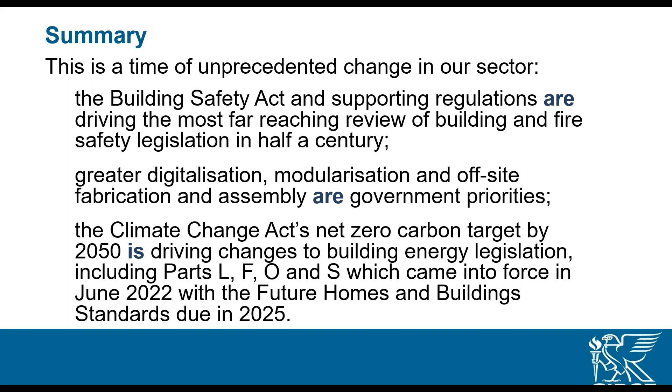Thank you, Christos. Yes, we appear to have Hal back online. So if we can go back to his last slide. Hal, brilliant, thank you, Ant. I'm here, Ant. Can you hear me? We can, thank you, sir. Over to you. Well, ladies and gentlemen, I do apologise for that. It was the IT, I have no idea what happened or didn't happen. I'm just going to have to go really fast. You're going to get the slides and you'll have the recording.

So we have the Building Safety Act. The Act makes some fundamental changes to the Building Act 1984, and it provides enabling powers that will permit the Secretary of State, currently Michael Gove, to introduce a wide range of new regulations to implement the various aspects of the Act, and I will go through them in a little more detail shortly. We also have the building regulations, and they will be part of the implementation package. And of course, we have net zero carbon related policy. There might be some uncertainty about what that looks like right now, given some of the announcements of the last month or two, but I think we have the Climate Change Act, that is an act, it's there. We have a net zero target, it's just not clear how we're going to get there yet.

We think that the Future Home Standard and the Future Building Standard, which are currently under development, will help us get there. And then we have other policy drivers. We have things like the Construction Playbook, Constructing the Gold Standard, the Transforming Infrastructure Performance. All of these are playing out. We have modern methods of construction, about which a lot more in the final session. And then this afternoon, we've got a session on physical and cyber security.

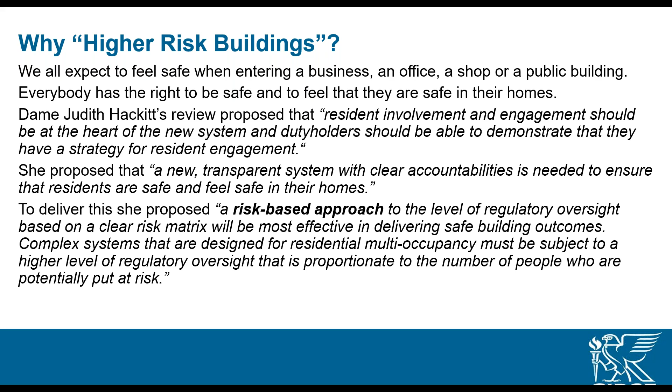It's worth noting that Part 4 of the Act applies to higher risk buildings in occupation. We've extended building legislation into operation there for the very first time. Now, I'm going to have to go very quickly, but you will have these slides to look at later.

It's important to say the primary aim of the Building Safety Act is to remedy the systemic failures that Dame Judith identified and to create greater accountability and responsibility, to give residents a stronger voice, to protect leaseholders, and it also extends the scope of the Defective Premises Act. Overall, there is a desire to drive culture change in the industry.

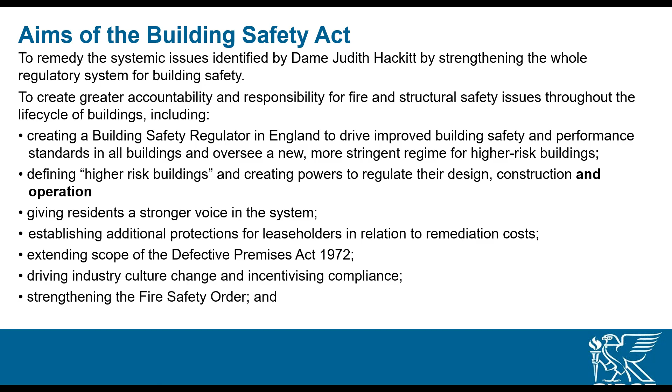And it also provides a clearer framework for construction products. Now, I'm not going to go through this in huge detail, but the Act comes in 6 parts, and it contains a lot of technical provisions relating to building regs, as well as provisions relating to the costs of building remediation.

Moving very swiftly through, part 1 is an introduction and scope and explains what the Act is doing. And as often happens with legislation, there are a number of secondary things tucked in there that government has wanted to do and has used the Act as a means to do it.

Worth saying that much of the Act only applies to England, but some of it applies to England and Wales, and some of it, particularly construction products and architects, applies to the whole of the UK.

Part 2 establishes the new regulator and committees and powers. So that's where the Building Safety Regulator comes in. Once up and running, it will have 3 new advisory committees, and the current Building Regulations Advisory Committee will be abolished. One of the consequences of this is that the department will be left without an independent scientific advisory committee.

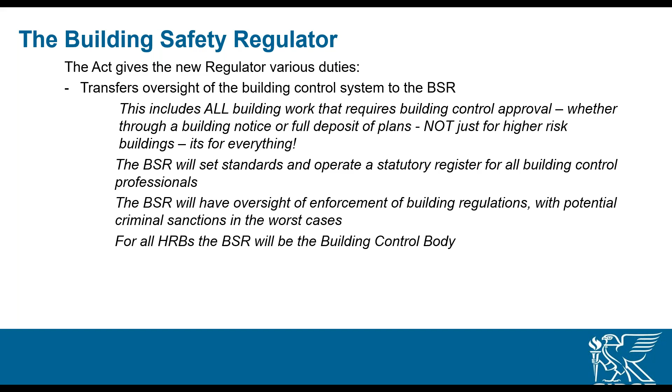The regulator is going to have various duties. It will have oversight of the whole building control system, meaning both private and public sector building control inspectors, and all aspects of building work will be within their remit. They will be setting the standards and operating a register for building inspectors, and they will be overseeing the new enforcement regime, which includes the potential for criminal sanctions and extends the time limits for enforcement action from what we have had up until now.

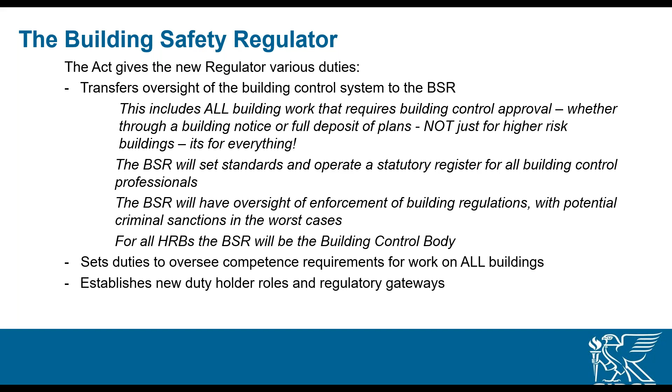And they also have a duty to oversee competence requirements, and again, that's for work on all buildings. It's not just HRBs.

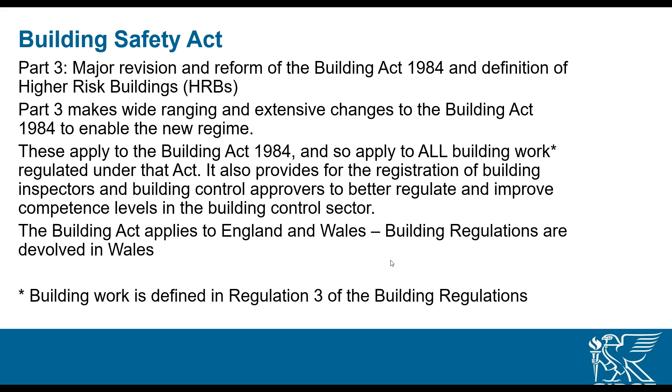Part 3 is a major revision of the Building Act, and there is a huge amount of detail there. It has effectively updated the Act and also introduced a significant number of new provisions that will enable the regulations that are coming and will support the work of the regulator. And if you want to know what building work is, please go and look at Regulation 3 of the building regs, because it's set out there.

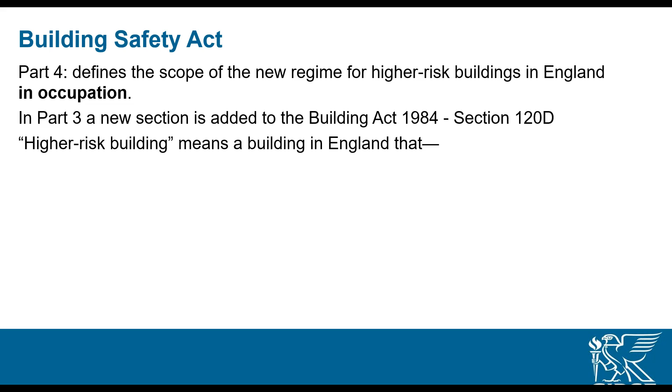As I've already explained, Part 4 deals with higher risk buildings in occupation. So it's not just new build, it's all of them, and there are about 12,500, we believe, and they are all going to be under the oversight of the regulator. We've done the bit about higher risk buildings, and it will apply throughout their life, and there will be an accountable person who must be appointed for every higher risk building.

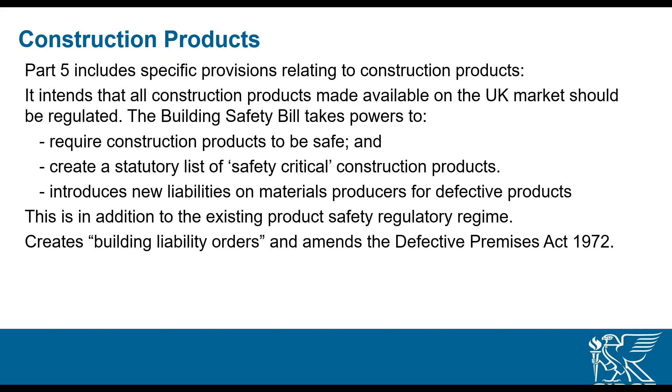I mentioned construction products, and there's been a lot of talk about product safety, and the bill provides powers to require construction products to be safe, to create a list of safety critical construction products, and it also brings in new liabilities on materials producers for defective products. And this all sits on top of the current regime, and indeed there is a new regulator in the Office of Product Safety and Standards, the OPSS, and that sits within BEIS, but again it will be answerable on policy for construction products to DLUHC. And there are also some building liability orders tucked in there, which I would recommend that product manufacturers are aware of. And there's a new Homes Ombudsman scheme.

So what? And we're nearly there, and I think we're going to have a few minutes of questions. How will building professionals need to respond?

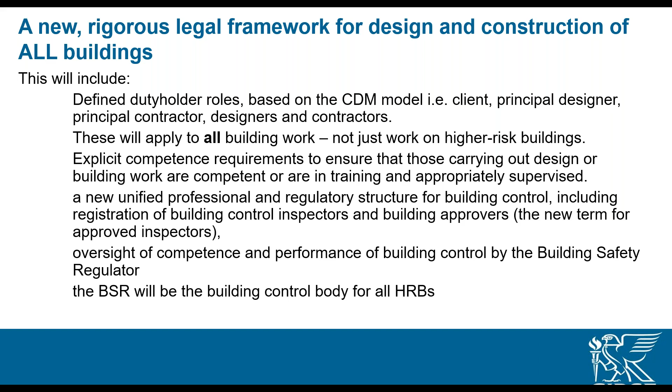Well, first of all, anybody in the sector needs to get real. The Building Safety Act is for all. It's not an optional extra. It's not just for high-rise apartments. It's for everything. And there are going to be some very explicit new requirements around competence. Everybody working in the industry needs to be thinking, how can I demonstrate that I am competent to do what I do? What evidence would I put in front of somebody who asked me to demonstrate my competence? And that needn't be a regulator, that could be a client taking their new responsibility to take all reasonable steps to assure themselves that the people they're appointing are competent.

So that's going to be a big change. And then, a final question about how we react to this. We do need to be clear that these changes in legislation are coming. They're not optional. They're not going away. There are going to be changes to professional accreditation for those who are in the professions. There are going to be the new roles of principal designer and contractor. The HSE will be overseeing building regulations and the building control function. There are going to be responsibilities on accountable persons in higher risk buildings. We're going to see a requirement for the golden thread, for safety cases.

And for existing HRBs, there will be periodic reapproval and certification. So there is a huge amount coming. I quite understand when people ask about resources and timing, but the truth of the matter is we've had 5 years warning that major change is coming. And the best time to have started preparing would probably have been a little while ago, but if we haven't, then the time to start preparing is now. And at that, I'm going to stop and hand back to Ant, and that just leaves us 5 minutes for questions.

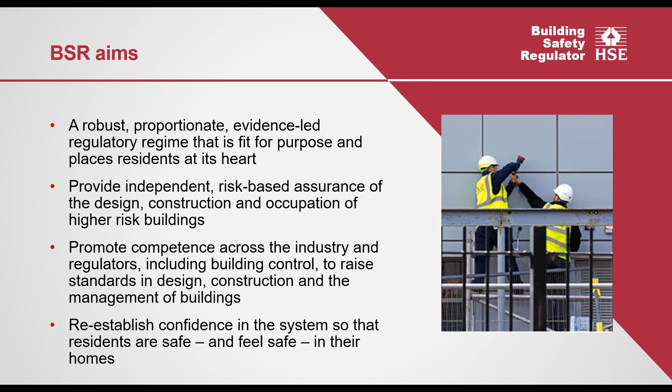As was mentioned previously, and I'm going to double down on this message a few times, the new regulatory regime isn't just about high-rise buildings. High-rise buildings are a very important element, but they're just one of three key focuses. I'll start with the oversight function, which has two key elements: the regulation of the building control profession, creating a regulated profession, and the wider oversight of the built environment, ensuring safety and standards for buildings now and in the future.

Picking up on the building control side, BSR is developing performance standards called operational standards, rules, and key performance indicators to oversee, monitor and assess the performance of the profession. This comes from the key driver highlighted by Dame Judith in her report around increasing consistency and moving the profession away from what was perceived as a service provider role into a more regulatory space. We don't see this as any criticism of very diligent building control professionals, just a recognition that there's been some inconsistency in the past, and we're looking at ways to address that.

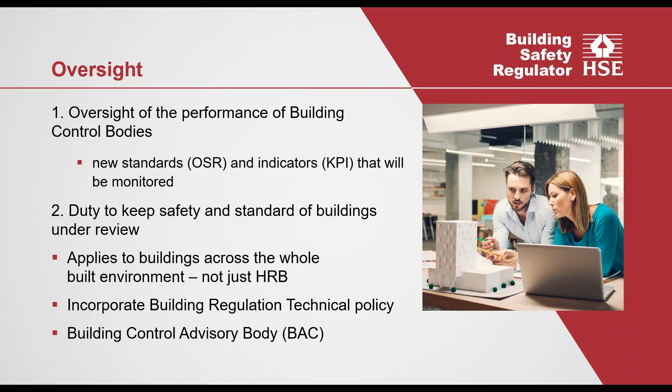DLUHC will retain the policy lead for the building regulations and the Act, but the technical policy, the approved documents, and the guidance underneath that - HSE, in the form of the BSR, will be taking that lead. What we'll look to do is assess how that whole system is working, challenge where it's not being used effectively, and change where we think the standards aren't working or need updating to consider future needs.

As part of that process, the next item is the Building Advisory Committee. This dovetails in and supports nicely that wider oversight, as we'll be using this to think about the strategic steps we need to take to improve standards. It'll be made up of 13 leaders and experts across the spectrum of industry. The recruitment process has just finished, and we aim to have a first meeting in December.

Hal, who spoke previously, was the chair of the Building Regulation Advisory Committee. BAC isn't going to replace BRAC in its functions. It will have, from our perspective, a wider remit, a much more strategic overview, to encourage and promote the use of the right standards, and challenge where necessary, think about new and emerging issues, but also provide intelligence, think about the effectiveness of the regime as it is, including the proportionality of the BSR's approach.

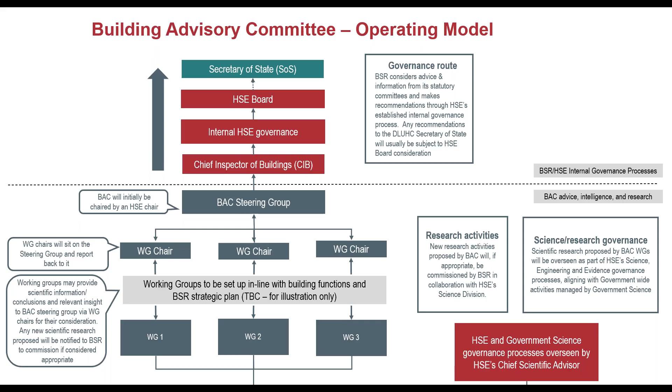So moving into competence, my area, and I'll say it again: the BSR has responsibility to promote competence across all buildings. And I think, as I said last year, double down again on this point. Lots of feedback I've had from various stakeholders, and I think Hal touched on this as well in his presentation, that people will look to avoid the new regulatory regime by not working on higher rise residential buildings. And I think it's important to say that's simply not the case. The oversight and the competence requirements in the law, which I'll touch upon later on, extend much more widely than just high-rise buildings.

And the approach we've taken to competence very much follows the recommendation of Dame Judith Hackitt, looking to support industry to come up with frameworks and standards for training and verification. We really don't see it as government's job to set all this out, because we acknowledge the people doing the job in industry are best placed to understand what needs to happen to raise the game.

I think part of the process, and I was privileged to be on the steering committee for the various PASs that Hal mentioned previously, is actually trying to work out what is proportional. We want to be aspirational in terms of the competency requirements, but we don't want to set the barrier so high that it can't be reasonably achieved. So actually trying to work through all of that and work out what the requirements are and how these can be achieved is possibly one of the challenges.

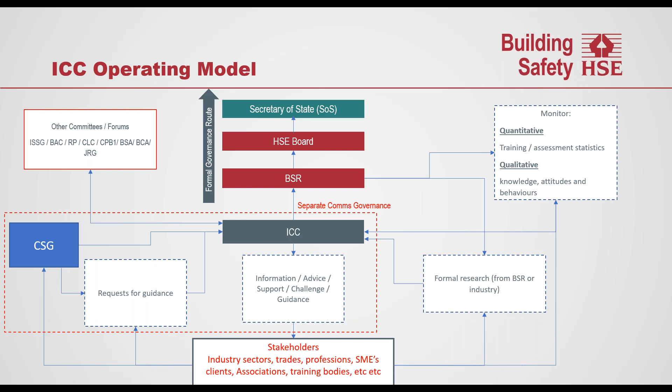This slide is a little bit busy, apologies for that. It also sets out lots of the activity, the monitoring, the guidance, etc. I think this next slide may well be a little bit more helpful because that sets out in a more simplistic way what the committee is looking to achieve.

So obviously it starts with industry, the stakeholders. I think what we want to start doing is to review and monitor what's actually going on in terms of competence provision, where are the gaps, where are the challenges, who's doing it well, and then oversee this to try and think about how we facilitate improvements. That might be through advice to the BSR, or direct advice to industry or potentially the public. Then, completing the circle, we want to carry out research to learn, to really understand, is what we're doing effective, what more can we do, and then complete the cycle again.

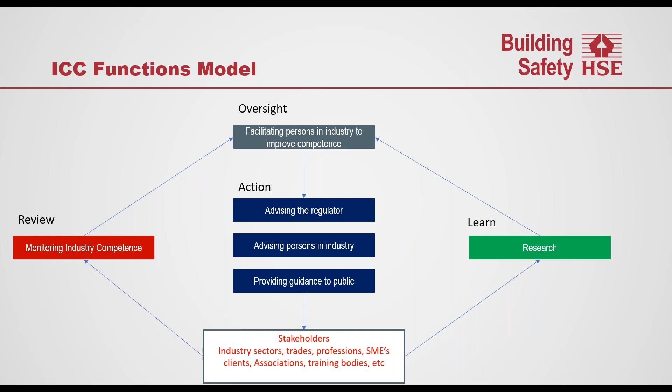So that's the plan of what we want to do. How we want to do it is set out in this slide, and this is a theory of change model for competence, or intervention logic model. It sets out the process at a very high level that we think needs to occur in order to improve competence. Improve competence is obviously a very big thing to say, so this unpacks that to a certain extent and puts that into a staged process.

So going from left to right, what we need to have first is those standards, frameworks, codes, guidance, so individuals in the built environment, no matter what sector or role they're in, understand what the competence requirements are. A lot of this work has already happened. Obviously the BSI PAS standards for principal contractor, principal designer, and those managing buildings is exactly what's required to set out those standards, along with the Flex document, which explains how those competency frameworks can do that. And then the work of the competence steering group is also really pivotal in setting out further benchmarks and requirements for different trades, professions and crafts across the built environment.

Some of the work of the interim industry competence committee involves looking to survey the wider built environment.

I mentioned CSG, I mentioned the BSI, but actually there's lots and lots of sectors out there, and we're not sure who has frameworks and guidance to set out competence and who doesn't. So I think that's part of the work the interim committee will be doing.

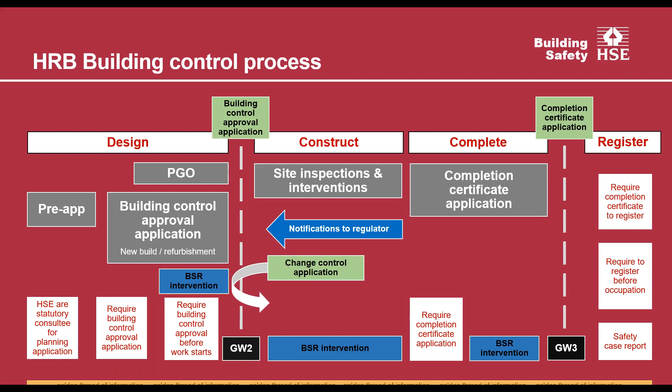Yes, so the golden thread. I think this is really important. I think the BRAC definition is a very good one. I personally use an even shorter definition: it's the important information about building safety. And your test of something that goes into the golden thread is, is it important for building safety? Is it something that somebody trying to manage a building now or in the future would need to know?

If yes, you keep it. If no, you don't. I know that sounds easy and probably a massive oversimplification, because I think a lot of the information you'll get is probably going to be in that grey area in the middle. But that requires somebody, or a team of people, to make some intelligent decisions about what information they keep.

Obviously, you will require some software, some IT infrastructure to store the information and collate it. However, I don't think there's going to be software that will enable you to make those very difficult decisions. I don't know if there's an Elon Musk style Cyberdyne Systems, Skynet, AI supercomputer out there. I think that requires people to make those difficult decisions, because, and I may have said this last year, I think the worst decision you could make is to keep everything, because if you mix the unimportant with the important, you make the important unobtainable, in my experience.

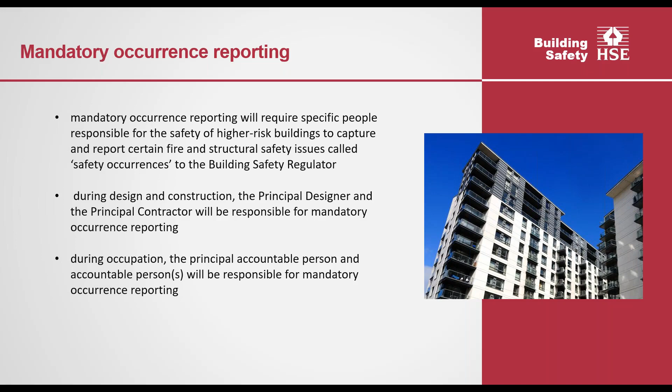New topic: mandatory occurrence reporting. I won't go into too much detail, but we'll look for responsible people to capture reports of fire and structural issues, or the precursors to them. During design and construction, this will be the principal designer and principal contractor. During occupation, this will be the principal accountable person or the accountable persons. I don't have lots of details to give, but there will almost certainly be a focus on key indicators of any potential catastrophic failure.

Safety cases. Moving away from design and construction into occupation, one of the key requirements will be the production of a safety case and a safety case report for those managing higher-risk buildings. It's a very new concept for higher-risk buildings in occupation. It comes from the regulation of chemicals, nuclear and aviation sectors, as a way to mitigate the types of high hazard events that happen there.

Think of a safety case almost like a risk assessment: identifying the hazards, the route by which people are likely to be harmed, how it will happen, and the measures in place to reduce those risks or mitigate the consequences. The safety case draws together all the information from your golden thread that you use to manage fire and structural safety risk in your building. It's the evidence used to demonstrate or justify how you're preventing a major accident.

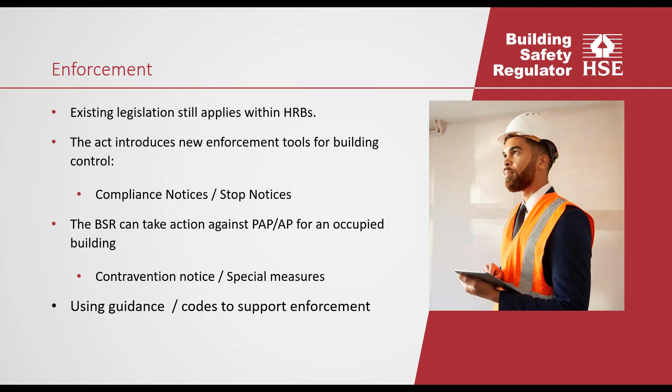And just finally, multidisciplinary teams. So this is how we're going to operate in terms of the regulators. One of the criticisms of the Grenfell tragedy was regulators not operating in a joined up capacity.

So we decided very early on that we weren't going to try and recreate specialisms within the Building Safety Regulator, because actually we've got the expertise in others - building control, fire authority. So what we're going to do is all work together and form what's called a multidisciplinary team to assess the parts of the project that are within our competence, skill set, expertise.

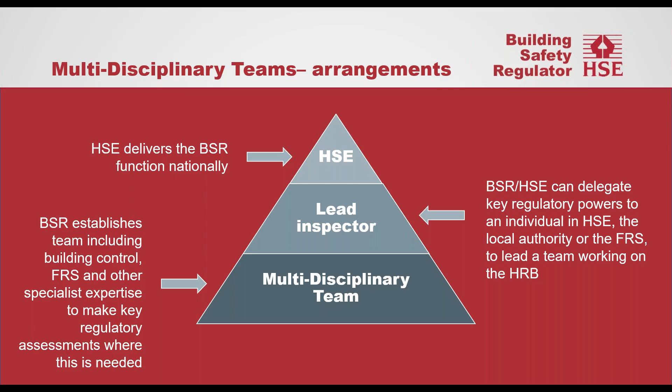HSE, the BSR, will be the ultimate decision maker within that process, but actually we'll make those decisions based on the recommendations of building control experts and fire experts. And that is me.

So I'm quite happy to take some questions, and I'll put on my camera.

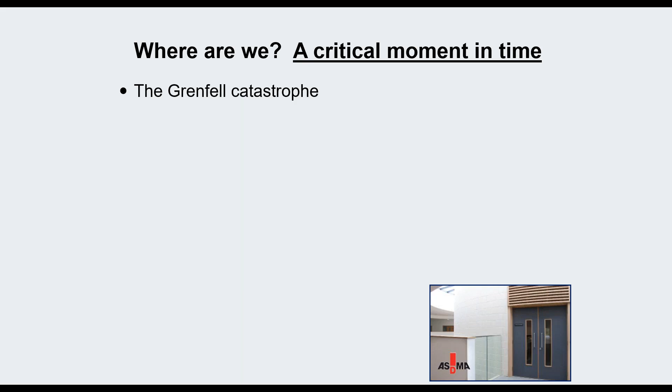The Grenfell catastrophe, certainly profoundly shocking, a profound shake-up. It shouldn't have happened, and we should leave it for the inquiry to finish its job with its report. As the judge summed up, there's a task there to untangle individual mistakes from commercial company cultures and company mistakes, common misconceptions, and the common paradigm that applied in building design at the time the design was put together. So we wait for the inquiry.

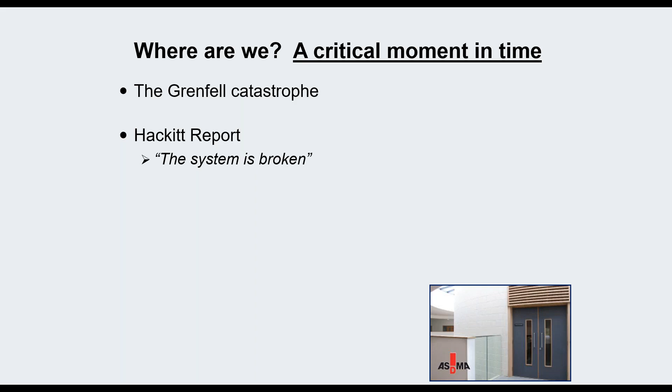The Hackitt report has been referred to, 156 pages and thousands of words, which so often you hear summarized in four words: the system is broken. I don't entirely buy that in its entirety. Certainly the system has not worked as it should have done, and it needs to be repaired, and we've heard a certain amount of work going on to do that, so we should let that run its course.

Part of that is new foundation legislation, which very much is establishing a competency-based culture, and competency for me implies knowledge base as well as the right attitude. And I think a lot of people will agree that there needs to be a tremendous improvement in the level of knowledge, and as far as I'm concerned, that applies very much to products.

That's the expectation I have with the Morrell report, Testing for a Safer Future, which was set up by government to report last year, about a year ago, I believe it did, on testing and certification aspects. We haven't seen it yet, and it isn't yet in the public domain, so it isn't commonly appreciated what it contains. It's been withheld, and the reason why is not clear.

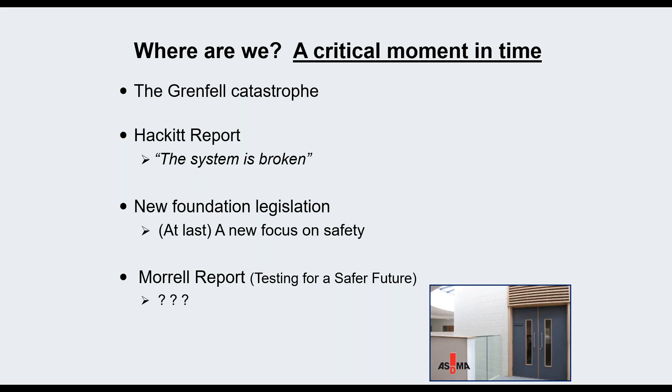But as far as I'm concerned, I have high hopes of the Morrell report, and I think it will be just as important as the Hackitt report. I expect it to be. There's going to be plenty of food for thought, I'm sure, in its content.

To sum up, there is a desperate need, really, to rebuild trust. Not just trust in how construction works, but trust in products and design. And at this point, I think I'd like to make three key points on the basis of trust.

First of all, there hasn't so far been enough focus on the good, and there are strengths in the UK approach. There are good products, there are good companies, there are certainly good sectors and good approaches which can provide examples, but they've not been given enough airtime, and hopefully we can start that and get more attention.

Number two, it isn't right and logical to assume that problems identified in one particular area automatically translate across to problems in all areas. But that seems to be the dominant thinking, and it's a narrative that seems to suit the way forward. But I would make a plea to look at the good examples and follow those up rather than inventing new solutions. There are existing solutions already.

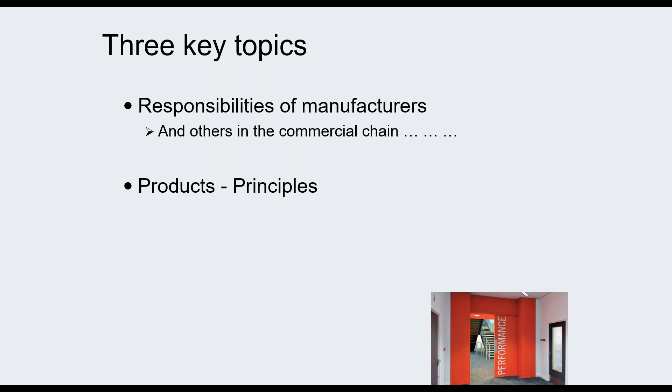Then, technology is very important - not just the product, but product technology - and I'll describe what I mean by that, how to evaluate a technology. It means a lot of testing. At the end of the day, validation of performance, confidence in product performance, and assurance of product performance is fundamentally important, and that requires a lot of testing, which leads into certification.

So I will finish up with an explanation of what I mean by certification, as opposed to what you may mean by certification.

So the first part, responsibilities of manufacturers and others. For me, it's clear that anybody who produces and handles a product can't just throw it into the market and expect others to decide how to use it and to know how to use it. So fitness for purpose is key, not just compliance with the specification, but demonstrating fitness for purpose, which includes, especially for fire, safety applications.

In some cases, not just fire safety, but certainly safety in various applications in other respects. For doors, for example, that would be safe use of the doors - opening, closing, no accidents, no injuries, etc. Not so easy to achieve.

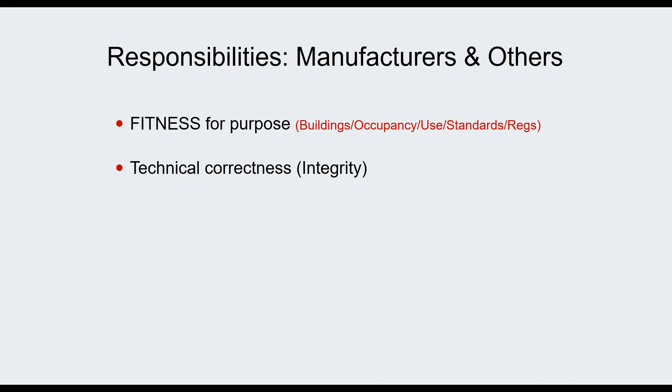With reference, I think guidance on how to use and apply products is very important, not only from manufacturers, but especially from trade bodies. Within that, there are three particular points I want to draw attention to. There's a good word in fire resistance called integrity, which means technical correctness and rigor, and I don't think that can be placed on one side. That should be a primary requirement, which leads to the second point: technical should be above marketing. Marketing should be subordinate to technical, where we have technical applications and technical products. I'm afraid too often it's the other way around, and we don't have the technical substance, but we have the image marketing. That's not, as far as I'm concerned, desirable if we're looking at safety, and safety critical in particular.

You can't avoid the relevance of information and data to the situation and the use. That's in particular data and information which must be appropriate, relevant and applicable, ARA. So it isn't acceptable to take test information for one product and apply it to another or to a different design. It isn't appropriate, it isn't relevant, and it wouldn't be applicable. Those three: technical correctness, image marketing subordinate to technical, and the relevance of information and data to the situation and use of the product, very important.

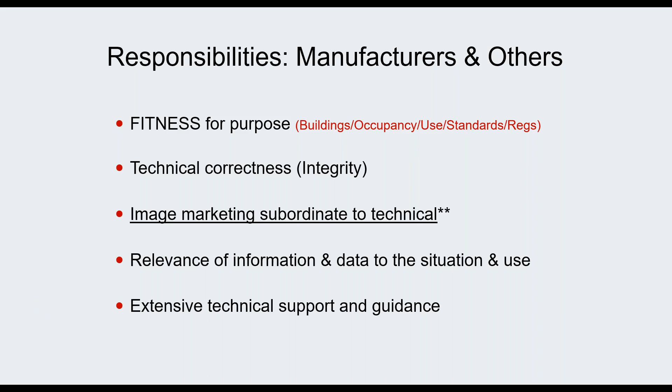I'll add that the final point, that extensive technical support and guidance is needed, and for that I really am a great believer. You heard at the beginning my commitment to trade associations. I think they're very important indeed, because they represent the particular sector and companies in the sector and those who serve the companies in the sector. They're ideal for bringing together best practice guidance, so to speak, on neutral ground without commercial implications, and they can bring it together from the companies in the sector and summarize it and make it available for all those who are going to be using the products provided by the sector.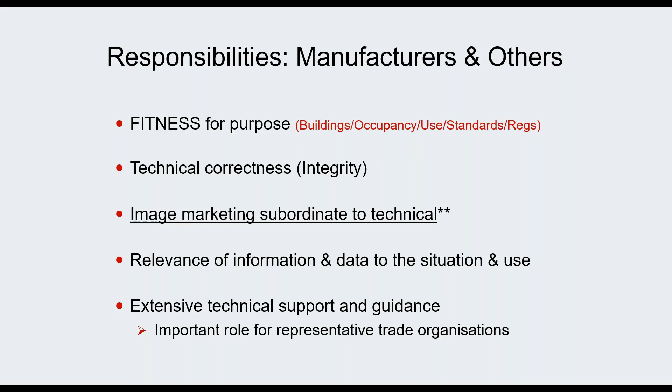So the next two slides illustrate, just by reason of illustration and example, some of the documents that come from ASDMA. There are others. I've just picked these because these are some of the main documents, but there's smaller ones, single page documents, double page documents, five-page documents. These are just examples of some of the key documents that are available from the Trade Association's Knowledge Centre on its website, easy to find.

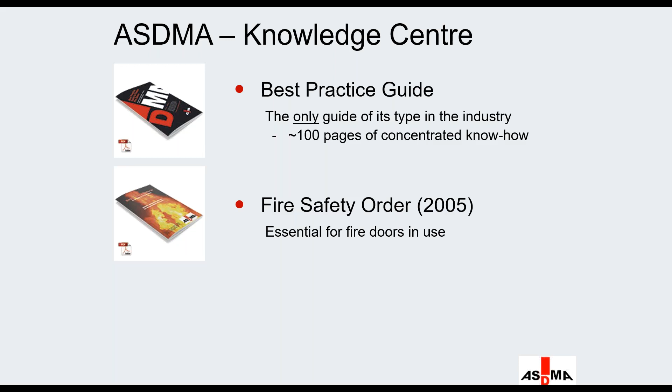So more than 100 pages of a best practice guide. It stood the test of time. Really is best practice from a former age maybe, but it's still the best practice of the sector. There's explanation on things like the Fire Safety Order. Similarly, there'll be guidance on the Building Safety Act and the Fire Safety Act and so on. Recommendations on acoustics, because that's just as important for many doors as fire safety is. How to install, maintenance, damage and troubleshooting advice, safety considerations including security, and coordination of bespoke door sets with what's around it and how it fits into a building.

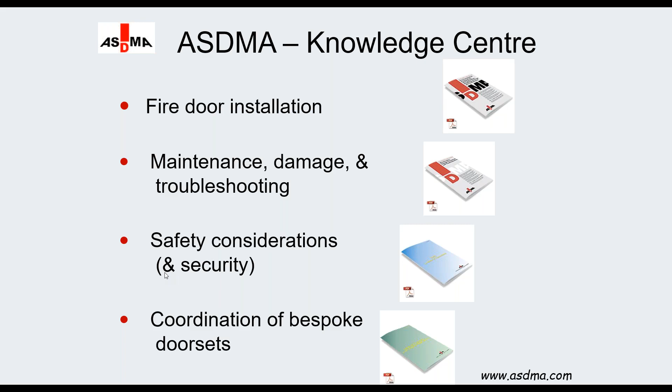Right, so I want to focus rather than product on product technology. The first point is really quite fundamental, that a lot of construction products fundamentally depend on a system mentality. A fire door, for example, it's surprising - you may not realize a fire door is really quite complex construction. But you find in a fire door something like 50 main items in a single door. There's something like 144 different timbers commercially available on the market to manufacturers. Typically they'll hold in stock 70 to 80 veneers.

Amazingly, if you sketch out and draw the various configurations - single doors, double doors, single acting, double acting, with panels, with glazing, with side panels, with side glaze, etc. - there's a total of 288 door configurations you can draw up. A manufacturer, not producing commodity product, but producing specialized bespoke doors to individual specifications, maybe 50, 20, 30, up to 100 or so at a time. The plant will be in different workstations, and there may be 20 to 30 workstations in line, and products will go through various workstations according to the specification that they're going to be satisfying.

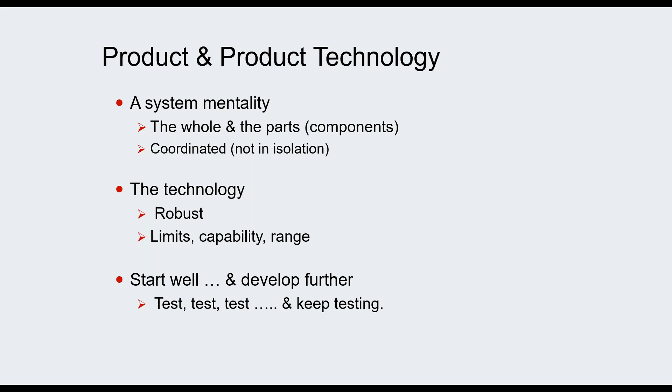The key conclusion is you can't leave fire safety to chance, or any safety for that matter. It must be something that's designed for, planned for, focused on, and continually evaluated against the conditions where the product is going to be used, potentially and actually. That's a very important point. Fire safety must be designed for, and it must be focused on specifically to perform in the conditions where it's expected to behave safely and as intended.

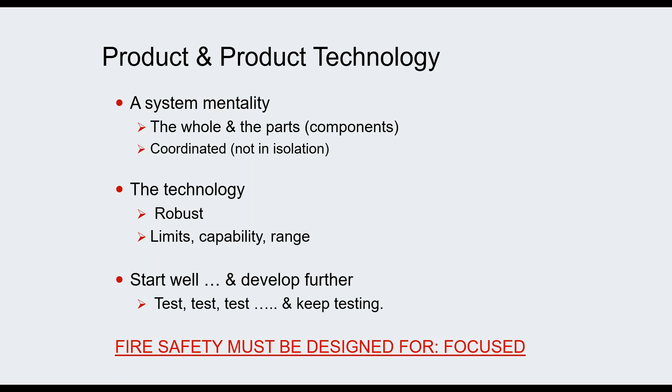It must follow a scientific approach. Actually, developers of products follow a scientific approach, probably without realizing it. And there's got to be a role for a technical product technologist. I sometimes wonder if I'm the only one who thinks that. So many times I just see products looked at in isolation, away from the application, away from the technology, just as a product in isolation.

So it's important to have, you could call it theory, but it's more than that, a product technology model. So you put all the sum total of testing information together that you're aware of, and sometimes you'll be testing to evaluate a weakness, to see if it is a weakness. Sometimes you'll be testing beyond the field of known test experience just to evaluate where that takes you.

So it's a scientific process based on a model or a theory of how, for example, a fire door works, how it functions in practice, how a glass works, how it behaves in different combinations, different sizes, different glazing arrays, including sensitivities, with a commitment to improve. So you're all the time testing the model, evaluating the theory to make sure it works, and grafting in the new information that you get from testing. So it's a continuous improvement, not static.

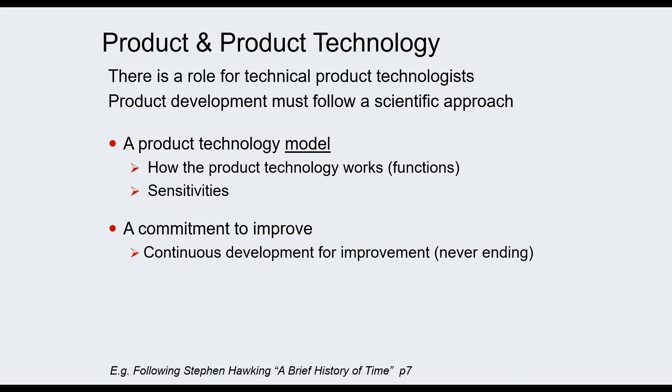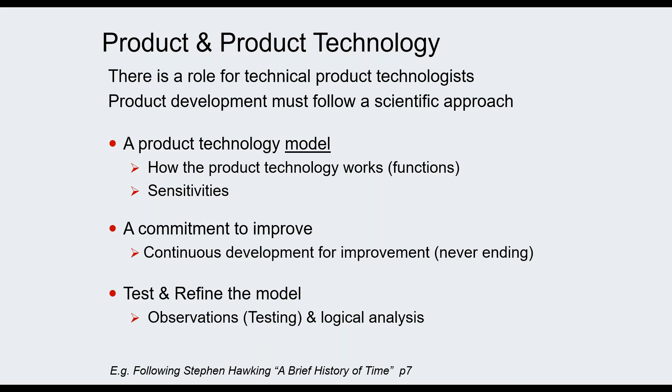And it's never ending, because the demands from buildings change. Specifiers are notorious for asking for almost impossible requirements. So there's always pressure to develop to suit the application and the specification that's required. And so everything goes together. It's a circle: test and refine the model, do more testing, make more observations, carry out more logical analysis of what happens, and develop very much a system understanding.

The task for the technologists, the manufacturers, the developers is to communicate that understanding of how systems work, especially being honest and open on the limits of the technology, because there will be limits. So where can the product be used and where can't it be used? Where are the reservations? That sort of information should be part of the dialogue.

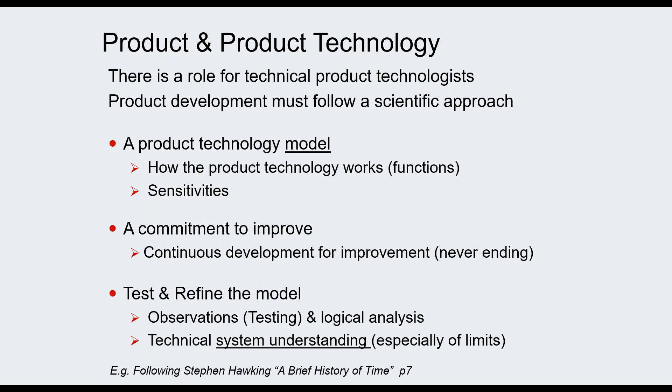What to look for in a test? So often I hear we got 31 minutes, we got 61 minutes, we got 62 minutes, that's enough. It isn't. It isn't. It's not just the result, you go further. So I would always take a test for fire resistance, for example, as far as it goes until I start to see failure in the test, because that's where you get most of the information.

And there's a well-established technique which originally came from the military, in the American military in the 1940s, which in effect is a basic risk assessment of products and product technologies from test observations and analysis of those, and is called FMEA, failure mode and effects analysis methodology. You can put a C in there as well if you wish: FMECA, failure mode and effects and criticality analysis.

This looks at several different aspects, all of which, if you're observing a test, this is the sort of thing you should be looking for: the mode of deterioration, the onset of critical failure, and what the failure within the test actually is. There's a world of difference.

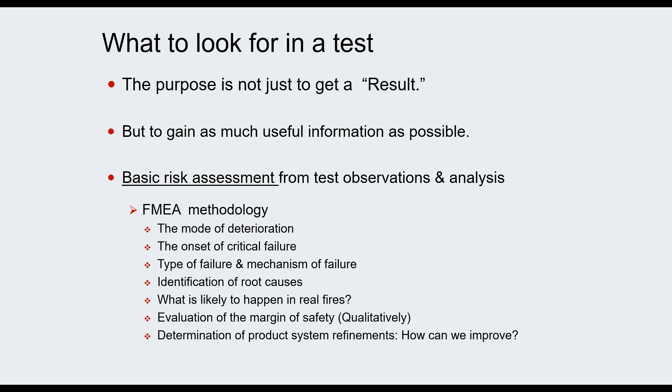And then you lead to product improvements and refinements, all of which is towards reducing the risk of failure in use. And if you put your name to a product, you need to have peace of mind that you've done all that you can possibly do.

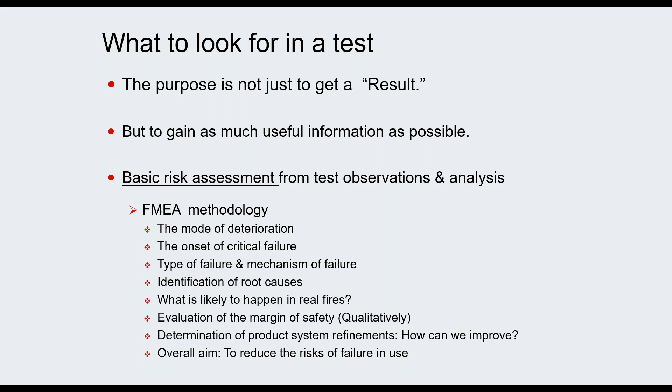So you would repeat this several times. You wouldn't do just one test. You don't just leave it at one test of one design.

So the test, it may be just one test, but all the tests that have gone before inform that one test and lead you to it. And in turn, that one test goes forward and informs all the future tests as well. So it's not a test in isolation, it's not just one result.

It's a whole mix of past experience and analysis of that experience in terms of the technology and the capabilities of the technology. So if you imagine lots of those situations overlapping, lots of those cones overlapping, it all goes to mutually reinforce itself so that you've got a good model concept of the product and how the product works. And that's really quite fundamental.

Accumulated test experience. And the more the merrier, the more you can see, the better. I used to have an office which was 2 minutes away from 2 very big German test furnaces, so I used to go and see a test every day, sometimes twice a day, accumulated over weeks and over years.

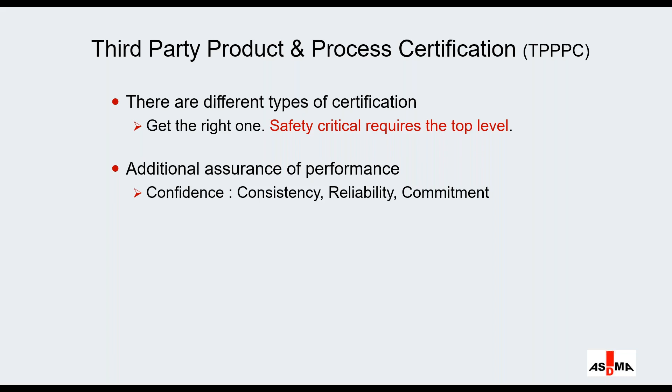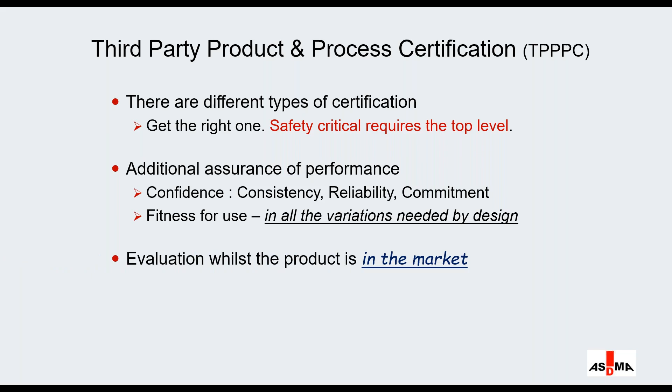This process of third-party product and process certification, TPPPC, is very much evaluating safety aspects and fitness for use aspects. And it's there to establish assurance of performance, level of confidence, consistency, reliability, commitment, especially fitness for use, especially with bespoke and specialist doors, all the variations that might be needed by design requirements. And it's in particular, it's evaluation whilst the product is in the market, responding to the market.

And auditing is routine. It leads to what are known as field of application reports and scope of design, which are very detailed documents. They will be something that can be several hundred pages long in some cases, typically 50, 60 pages long. I do know one of at least 300 pages long.

These itemize the product, the aspects of design. So they come with material listings, specific components. They'll come with descriptions of design, descriptions of test results, reference to test reports. Drawings will be provided, and as well supporting information which can come through the trade association typically.

Handling guidelines, how to store the product in a factory, for example, how to use the product, how to install the product, how to put it together. All that information is there with scope to prompt questions if you wish. It satisfies all the requirements of traceability. It gives a detailed description of the field of application of the product with scope of design and details of design.

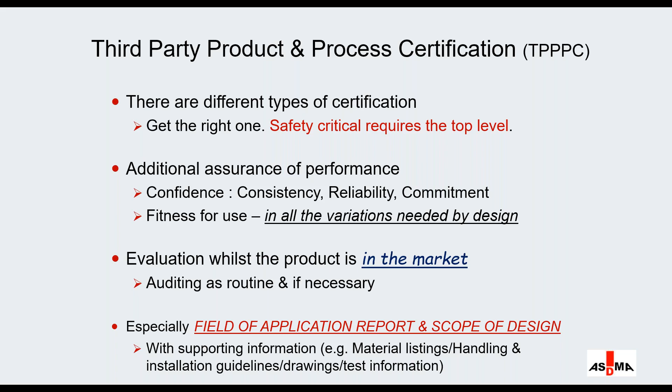That's very, very important, an important product. That's established and working now and originated in the 80s. It's a solution developed by British industry that is available to be adapted and adopted in the service of what now is called safety critical, but it's been there for a long time. Not widely recognized, I don't think, unless you're providing doors and taking doors from a manufacturer in relevant schemes.

We're getting to the end, thank goodness, you might say. So what now? There are two important things as far as I'm concerned. First of all, safety does require safety standards. We haven't started on that yet. You may be surprised to hear that. But for safety critical products in particular, that needs to be really given a focus. And we don't have those standards yet, so that work is to be done.

I would like to see the second, in conjunction with that, establishing third-party product and process certification for safety critical. Safety critical, it seems to me, essentially needs to be at the highest level of certification, and that's TPPPC.

We have bodies that provide that, but they're independent, commercial, and not working to national guidelines at the moment, so we need those national guidelines. We need a national oversight arbitration body to see that it's all working fairly, with impartiality, consistency, and with consultation of those who see themselves as part of the certification process - the manufacturers and others who take up certification, like installers. It could be anybody along the chain who decides to go for third-party product and process certification. There's a way forward, and that's going to be fundamentally part of the architecture and the environment going forward, as far as I'm concerned. I'd like that to be much more recognised and understood than it is at the moment. I think I'll leave it at that high level, and over to questions.

Basically, our brains are not in neat compartments, and we do like to put people in boxes with labels. So I've got a few here: ADHD, dyspraxia, dyslexia, and autism, and so on. But even within the autistic community, there's a huge variation in how that trait affects them. So we're all basically messy and all neurodiverse, and we've tried to avoid too much of the labeling when we looked at the PAS standard.

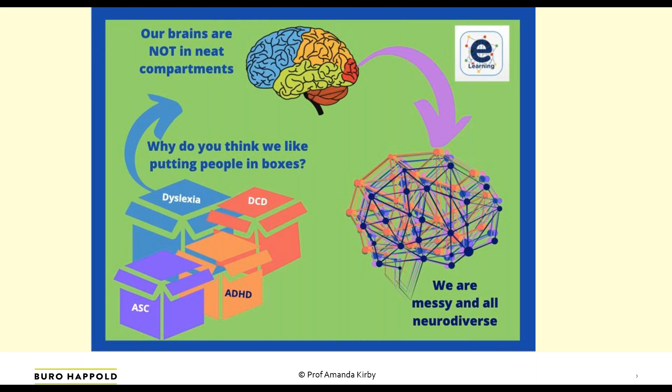The main thing that we're trying to resolve or make better with this standard is people who have sensory processing differences, and in particular have hypersensitivity to the environment around them. So some people might be very sensitive to noise or lighting, and some might be very, very sensitive to everything the senses experience - sense of smell, sense of touch, everything.

What this hypersensitivity can do is cause sensory overload during the course of the day, or by one incident. It can affect your heart rate, your breathing, your blood pressure, it can cause confusion. In many, many cases it causes anxiety and mental distress, and that in turn can affect some behaviour.

Around 70% of people who have a diagnosed neurodivergent condition are believed to be hypersensitive, so they experience things too intensely. The remaining 30% can be hyposensitive, in that they are undersensitive and therefore will seek out bright colours and additional sensory stimulation, touch and noise and so on.

When we've looked at the built environment, what we've said is, really it's the hypersensitivity that we should try and fix or make better, because that is the one where we're pushing people into sensory overload. Whereas when you're hyposensitive, you have some control over that yourself - you can wear fidget jewelry, have fidget items on your key ring, plonk items on your desk in front of you, or wear colourful clothing. There are other ways of getting that sensory stimulation. Whereas when you experience sensory overload, or the hypersensitivity, it's very, very difficult to shut out this bombardment on the senses on a day-to-day basis.

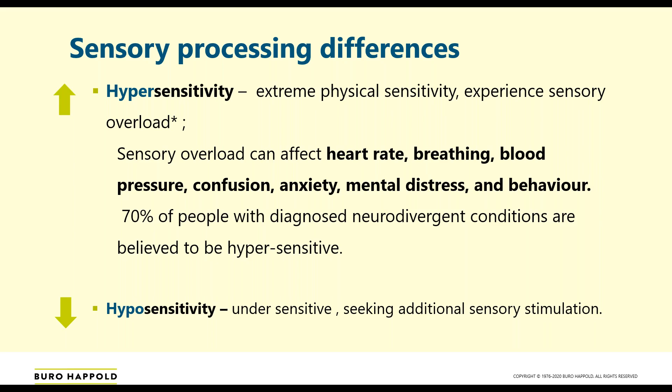What we've found during the development of the PAS is that many people who experience some of these challenges don't have a formal diagnosis for any sensory processing condition or difference. So they're either undiagnosed, or they might be like me - I'm neurotypical, but I have spikes in one or two areas. And I didn't actually realise I could apply this to myself until I became technical author and started working with so many experts.

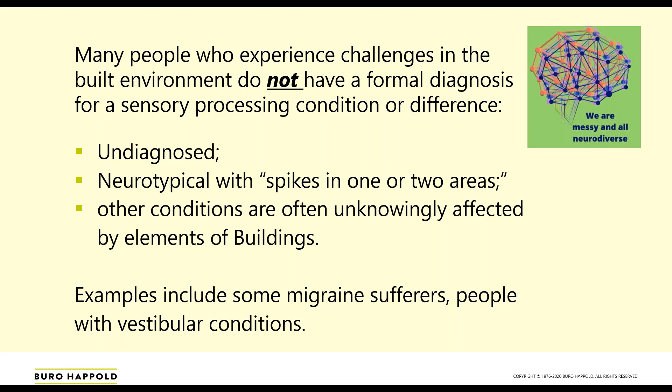There are other conditions, I believe, that have come to light, that are often unknowingly affected by elements of building. Examples would include some migraine sufferers who know lighting can cause it, but perhaps weren't aware of that having a hypersensitivity to it. And people with vestibular conditions, such as balance conditions like Meniere's, which my husband's got, who for years have known that certain patterns or certain frequency of noise can trigger an attack.

So we've arrived at this PAS 6463, Designed for the Mind, neurodiversity in the built environment. It was identified some years ago by the B559 committee, the one that Ant mentioned, that looks after access and the BS 8300 standards, that we're not doing enough in this area. In 2016, BSI did commission some research by Helen Hamlyn Centre - a very qualitative piece of research, very, very good, with lots of first-hand feedback from people with a variety of conditions who explained how the environment impacted on them negatively, including lighting and noise and so on.

So in 2018, BS 8300 does incorporate some high-level recommendations around this, because we had the benefit of that feedback. But then in 2019, the PAS commenced its journey, and as is usually the case with a PAS, we had sponsors - Transport for London first and foremost as a major sponsor. Buro Happold sponsored my involvement as technical author, and my client BBC Workplace were very happy to contribute as well, because they have many neurodivergent employees and recognised this was a really, really important area to know more about.

And Forbo - any floor finish is quite often a massive area and can have potentially massive impact on our senses. It can create a very calming environment, or it can be very exciting, and it can also cause sensory overload if we don't get it right. So those are the sponsors.

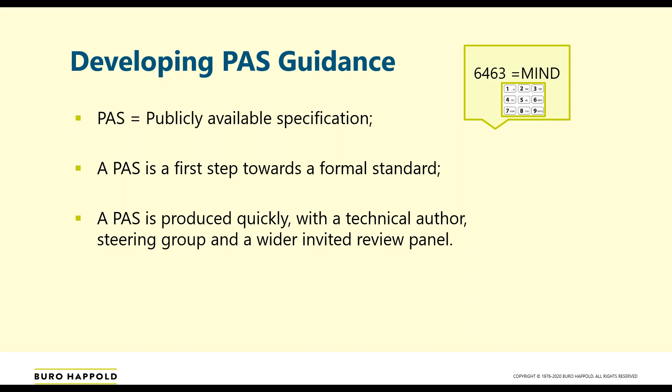The steering group, apart from their professional experiences, which was extraordinary across so many strands, also many of them had lived experience of living with a neurodivergent or neurodegenerative condition. Those people and organisations are listed in the foreword as usual, so you can find out more about them.

There was very significant interest in this standard during the public consultation from both professionals and consumers, and many, many hundreds of people with neurodivergent conditions who've been waiting a long time to see the built environment improve.

So who will benefit? Well, everyone and anyone, I think. There are times when we will all benefit from some of the advice and recommendations in this standard. It's likely to be a very broad spectrum in neurological sensory processing differences.

We've avoided, where possible, mentioning diagnosis or labels. That's because we couldn't capture every single label and we were sure to leave someone out, but also we didn't want people to dismiss it as saying, oh, that's only about autism, it's only about ADHD. It's very overlapping. Many of these experiences are the same for many conditions.

So the scope covers design and management, has to be both really. And the target audiences, of course, are anyone who's designing - architects, designers, planners, town planners, facility managers who are running the buildings, any decision maker, employers, even occupational therapists who are trying to help people in their home or their workplace, trying to deal with some of these challenges.

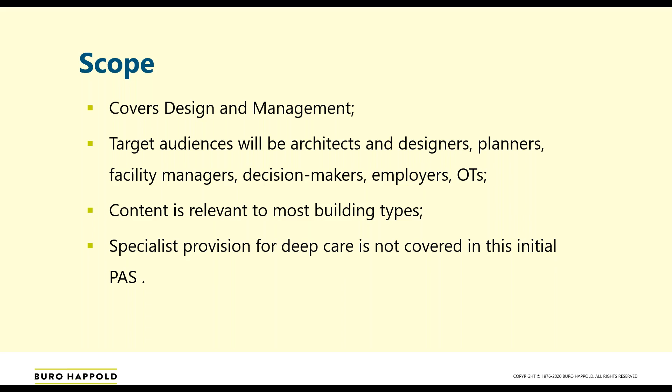The content, therefore, is most building types in mainstream provision. We don't feel that we've covered enough or gone deep enough for things like a dementia care home, or possibly some areas in a specialist educational needs environment such as school. However, I think there's still a lot they could take away from this standard in the common areas, for example.

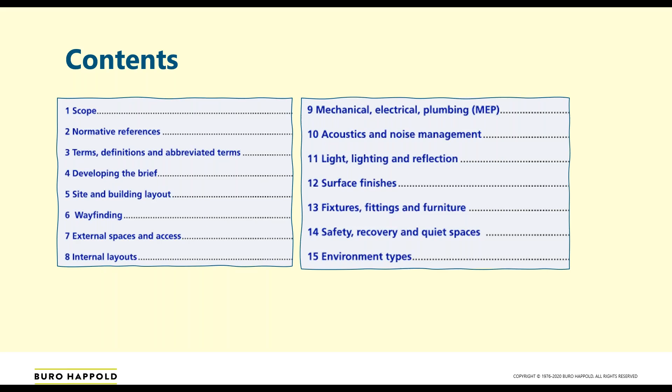This is the contents list, so there's 15 parts to it, and we've basically followed a structure that you would follow from concept through to completion of a building, if that makes sense. We've got a couple of annexes in there, one particularly around additional.

We've got management spread throughout - management type issues that come up, as well as design throughout the document - but we've also got a concerted effort on management in Annex A, and we've got a checklist around quiet and restorative spaces. Really, really important component of this standard, actually. And then Annex C has just got some symbols that have come from another standard in BSI that's been discontinued, but we felt were worthy of repeating, so we've brought them in here.

So although the standard isn't purely about new build, we followed the structure from a new build kind of concept stage, and we've got right early on about developing the brief, strategy and commitment you might have to this, how you engage stakeholders. So it's very important that people have a voice, and quite often on this one, we have found that it's less likely that people with neurodifference have been included at the table. So that's been part of the problem.

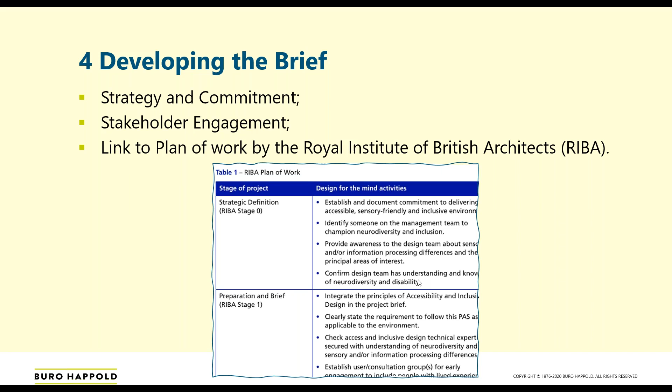And we've linked to the plan of work. So you can see here, I've got the RIBA plan of work. We've got the normal stages here. And we've kind of said how these design for the mind activities will impact and what you need to think about at each stage, because we thought the architects would find that structure quite helpful.

We looked at also external, so site and building layout, and the importance of the facade design. So it was quite interesting working with our own facades team at Buro Happold on some of this. Some of the designs that can be on an external facade can be very patterned. They can cause reflection and glare. They can cause heat gain.

So there can be issues around some of that. Also, the orientation of the building can help or hinder wayfinding and navigation. And the ability to have good sight lines and windows and views in and out can also be very, very helpful to people experiencing anxiety.

And the wayfinding section is quite big. We start looking at advanced information and preview. So you can imagine, if you are someone who experiences this hypersensitivity, you will want to know about the type of environment you're going into so that you can know what to expect. And that helps many, many people - it's a coping mechanism to help them deal with what's going on. So advanced information, either through a website or literature or a preview, even through a window, being able to see the room beyond and so on, can really, really help.

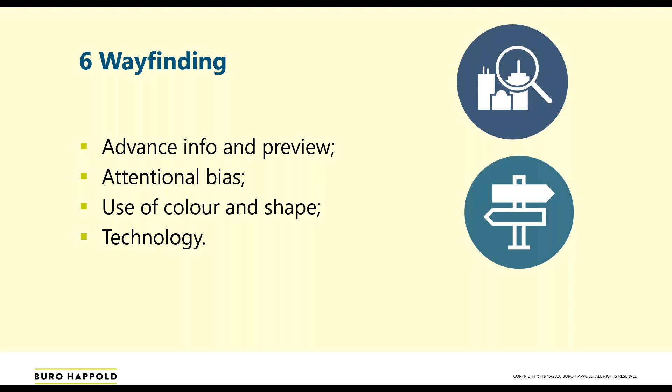We looked at things like attentional bias, which I think is quite well known in wayfinding circles. Once you introduce signage, for example, and suddenly change halfway through a building to a different style, shape and colour, that can really affect some people—to the effect that they don't see it at all, because the brain has filtered it out and is only looking for a particular style of sign. We've also looked at the role of technology in supporting wayfinding, which is really coming along in leaps and strides now, so it's a good thing to look at.

We looked at external spaces and access to nature. We obviously, as humans, have an innate affinity with nature, and we do this through either being in green space or outside, or touching, feeling and viewing natural materials or views akin to nature. So it could be images of green space, rivers and mountains, or it could be a real view of the real thing. All very, very important—the biophilic design aspect to this.

We looked at internal layouts, so how people transition between spaces, and sometimes the barriers come when you move from one type of space to another. That's an important consideration, as well as the layout and symmetry, the orderliness of a space—trying to reduce some of the clutter. We don't want things to be bland, sparse and feel institutionalized, but equally any items in there need to feel like they've got some symmetry and order to them. The familiarity, clarity and orientation of space can play a really important, helpful part in this.

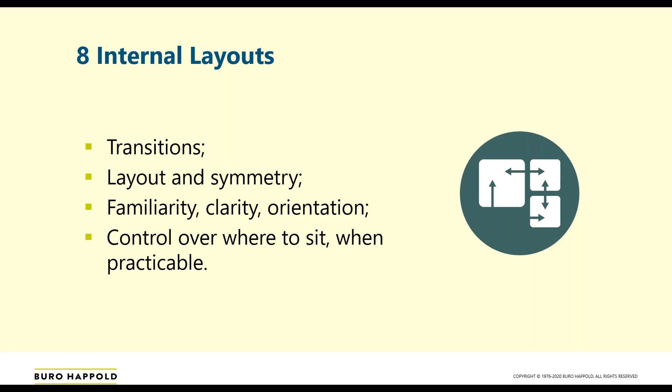One of the key things in the PAS is about giving people some control. Part of control might not necessarily be about throwing a switch, but it can also be about choosing where you go, where you sit, where you work from, or where you occupy a particular environment. So having different types of space is really, really helpful when we can—though we recognise not every building can do this.

One of the areas that has more in it than I was expecting at the outset is this one—we called it mechanical, electrical and plumbing, MEP. We've put in there anything to do with switching and control of the environment, and also things related to it, so there's a lot of procurement around this as well. When you buy a carpet or decide to introduce cleaning substances, we need to be very careful—if people have a really acute sense of smell, this can be really, really uncomfortable and distressing.

We all know about formaldehyde and off-gassing from carpets and things like that in the early days. So part of this will be about management and sending through fresh air to refresh the environment as well.

There was a connection here with COVID as well. We realised as the project went on—because this was very much a PAS developed during COVID—that people did lose their sense of smell, but some people were also left with a very enhanced sense of smell, which is not always a good thing and can be very distressing. So there are people with long COVID who have a really, really heightened sense of olfaction.

Acoustics, noise and lighting were probably the biggest areas of concern raised in the Helen Hamlyn Centre initial research, and we've certainly found that to be the case as we've gone on. The ability to adjust to variation in noise levels for someone who's neurodivergent can be very different, because they have that hypersensitivity in the first place. So acoustic layout and zoning will really help, offering different options—like this is a collaborative zone, this is a quiet zone, and so on.

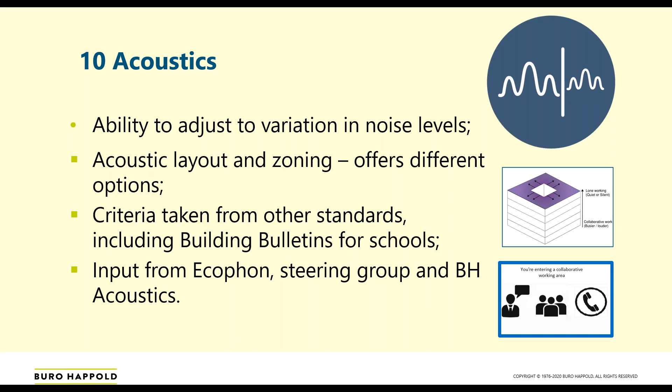We had input from Ecophon—a lady from Ecophon on the steering group who'd also studied dementia studies, so that was really useful. I also had Buro Happold Acoustics to work with, and the steering group had other members with lots of interest in this. It's a really key area for us.

Noise can affect physiological and psychological impact, and most of us who are neurotypical can adjust to some variation in levels, but it is going to be much, much harder for others, and that can cause sensory overload, stress, anxiety, etc.

There was a huge variation in what people are sensitive to. Some people might be more susceptible to continuous noise, others to intermittent noise. So I can definitely filter out continuous noise, but intermittent noise is more annoying. Unexpected noise, such as sudden loud crashes or sirens going off, is intrusive for many people, but not all. Some people just don't like a high volume of noise, and for some it's specific frequencies.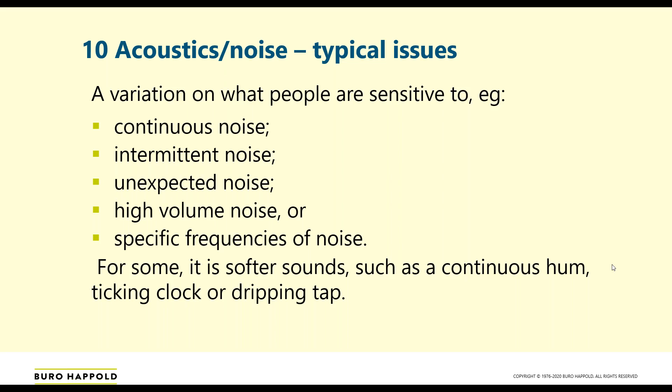Softer sounds such as a continuous hum, a ticking clock, or a dripping tap can be incredibly annoying. So introducing absorptive materials such as carpets and finishes, soft close lids on toilet seats and cupboards, quiet flushes, and quieter low noise appliances such as kettles, washing machines, and hand dryers were a key issue.

We realised from the hand dryer situation that many young children have hypersensitive hearing and can hear frequencies much more intensely than an adult can. So is it acceptable to have really high noise environments that children have to put their hands over their ears for? In some shared environments, therapeutic recorded sounds may be beneficial, but not everyone will tolerate those, so it's really about talking to users as well. A really silent environment might be better suited to a few, but for most people total silence is unhelpful, and most people want a little bit of background noise, otherwise you become very susceptible to hearing even the tiniest thing.

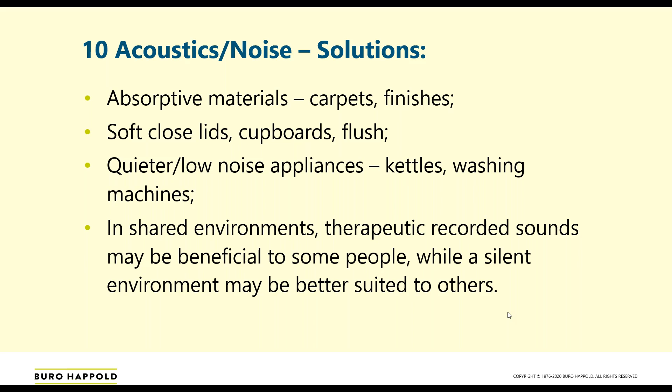Loads on lighting, so daylight, glare and shadows, are all potentially of interest and concern. We looked at flicker rates, and there was a myth when we started that fluorescent was always going to be worse than LED in flicker terms and intolerance. That's not the case at all. What we've discovered is that LED needs to be very carefully designed with appropriate driver types and so on. There's a linked piece of work we've done with the NDTI on lighting in healthcare, where this particularly came up, looking at types and levels and avoiding over specification.

Incandescent lighting, our old type of lighting, is actually often preferred by people who are neurodivergent and hypersensitive, but of course we can't go backwards and get that type of lighting anymore. So that's an interesting area for research, I think.

We looked at illumination ratios, so for example where you're currently working or sitting, and then when you move away from that, if the ratio is too great that can cause a quite startling effect. And we looked at color rendering index, the reality look of colors from artificial lighting. You can see here this is a better value for this half of the fruit bowl than the other half, and that can particularly affect some people with facial recognition and so on.

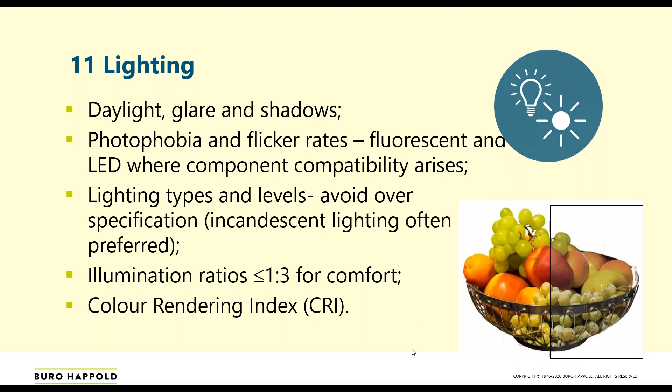Generally, the lighting that most hypersensitive people preferred was a warmer tone—so still a white light, but a warmer white. The cooler, bluer type of light, which we know raises our alertness and helps with concentration, can become very, very intrusive and cause sensory overload.

The follow-on piece of work we did was with the NDTI, looking at variable colour temperatures for places with 24/7 occupation, where people might actually be sleeping or recovering—hospital wards, living accommodation, hotels, or student hostels. They might want cool light when studying late at night to stay awake, but generally might benefit more from warmer light when they want to go to sleep. I think there are things in this lighting section that may impact other standards going forward.

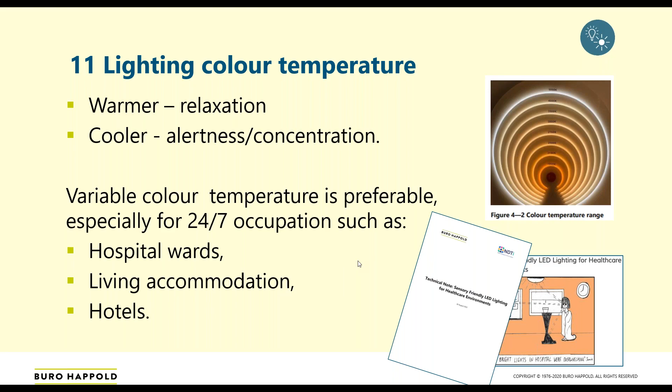Let's just slide around those color temperatures. When you're in the blue zone, basically you're much more likely to disrupt someone's circadian rhythm or sleep cycles if someone was in that zone and it wasn't the appropriate time. So for example, if you had that light in the evening.

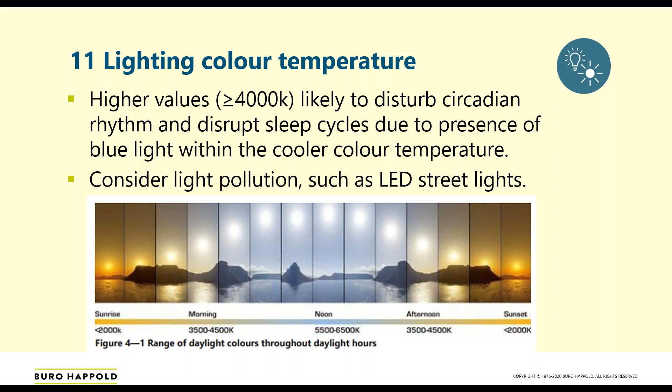I think we've also got to consider light pollution. If you have LED lights, street lights, which can be whiter now and a cooler color than the old type, that might affect some people's sleep patterns, particularly if we can't block out the light enough from windows and curtains and blinds. So adaptational lighting is particularly helpful in this group, and particularly for people with dementia or seasonal affective disorder as well. I think that can help people to acclimatise and overcome it.

It's not lighting per se that's a problem. I think it's poorly designed or not designed with this in mind - that's where the issue lies.

When we move to surface finishes, that works in connection with lighting - the light hits the surface and can bounce off. We have some content in there about reflection and glare off of surfaces, but also looking at the colours themselves. Not dictating what colours you can have per se, but saying if someone is sitting with a colour in their peripheral field for any length of time, such as in a meeting room, you really should try and make that more muted rather than vivid, because it can be very dominant on the senses.

There's a piece here around adjacent floor surfaces, which came from University of Stirling and their work on dementia, saying that for someone with Parkinson's or dementia, moving from one flooring type to another that is adjacent on the floor without some form of freeze where the body feels it can't step over it - it's a kind of barrier. It really needs to be lower than 10 LRV, so a very low level of contrast, really.

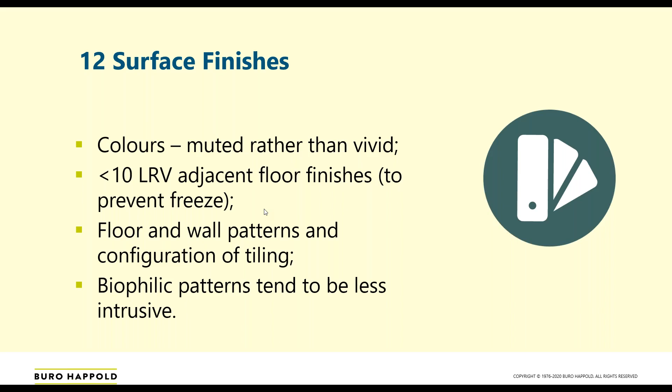You can have a floor tile, for example, that doesn't look as though it's going to cause any problem, but if you tessellate it, starting rotating some of those tiles, you can end up with quite a dominant pattern. A lot of this depends on the level of visual contrast in the pattern itself, and also whether it's a very linear pattern or whether it's biophilic, which happens more in nature.

And the biophilic patterns generally are less intrusive on the brain, and the brain can dismiss them as not being anything startling. We looked at fixtures, finishes, and furniture, and so on - this was more about where it's positioned in a space, is it symmetrical, what's the proxemics, have we got enough of a space bubble for people to move around? People with dyspraxia, for example, bump into things a lot, and then you can cause injury or even self-harm on some of these sharp corners. We looked at low noise items, which I've already mentioned, in the fixtures and fittings. Use of natural materials comes back to biophilia again, and just that familiarity and ease of operation.

Towards the end, we start looking at safety and recovery, and we do have a piece in there about emergency evacuation and the additional considerations for someone who's neurodivergent. If you can imagine a fire situation and somebody's senses are hypersensitive, you are in a situation that's likely to be very crowded, a lot of bustle, a lot of noise going on from the fire alarms - sometimes those can be intolerably loud, and there might be flashing lights as well. So that whole situation we feel is an area of concern and something that needs to be thought about, certainly on the management processes around evacuating people.

We've touched on safe environments and safeguarding, but the bigger section here is this quiet and restorative spaces, which we looked at in some detail, and it was informed by some research, which I'll mention in a moment.

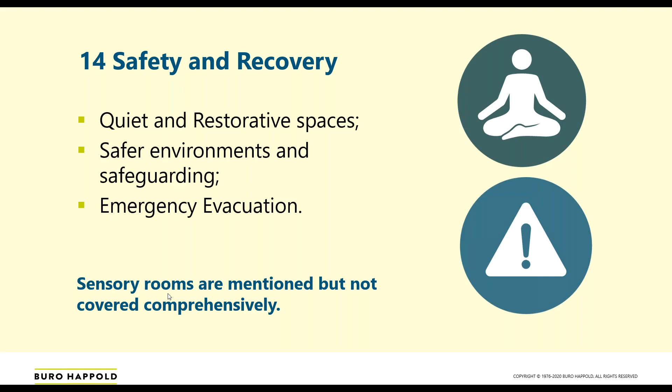So this is my colleague Toa. She was a student when we started the PAS, and I was talking to students about neurodiversity, as you would, and she decided to do her research project on autism and how you create a quiet room. Her sister was autistic, so she had familial experience of this, and she translated it into different languages and did an amazing piece of research that's been really helpful to this chapter 14. I'm pleased to say that Toa is now part of our team at Buro Happold. Of course, she would snatch someone up like that.

So we've done a deeper dive in this section. It's a quiet space rather than a sensory room. We talk about how you create them, and having one huge well-being or quiet space isn't always ideal. What you really want is a space where someone can go to feel rescued, to quickly reset and recover from a situation. So lots of little rooms are generally better, dotted around a big building or an estate, rather than just one, because when someone is hit by this, they can become non-verbal and have a kind of sensory shutdown.

There's much more in-depth acoustics, lighting, colour, and all of those features I've already mentioned, but a deeper dive in that section. And also the need to give some flexibility. So, for example, if you've got a couple of meeting rooms that are often empty, you can have flexibility that someone could choose to use that as a temporary quiet space in addition. I think that might be the way some companies have to go with offices, for example. And then Annex B has some support checklist tables, which were also generated by Toa.

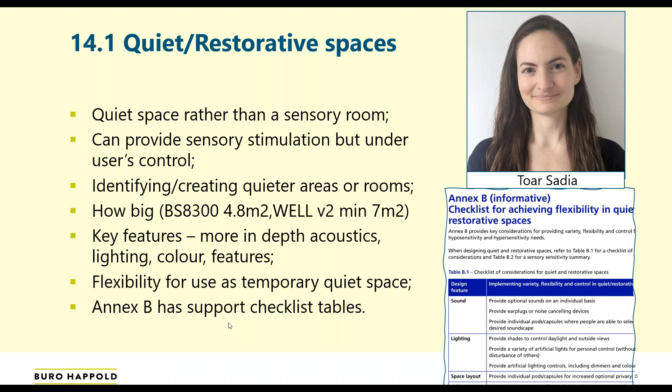I wanted to touch on mental health here, because if you're neurodivergent or neurodegenerative, you don't necessarily have poor mental health - it's not a given. However, if you can imagine being hypersensitive and experiencing this daily bombardment on the senses you're hypersensitive to, you can understand that if that continues for long periods of time, or it's a day-to-day occurrence, it's going to impact your mental well-being. I think that's why we are seeing a much higher incidence of mental health conditions amongst the neurodivergent community.

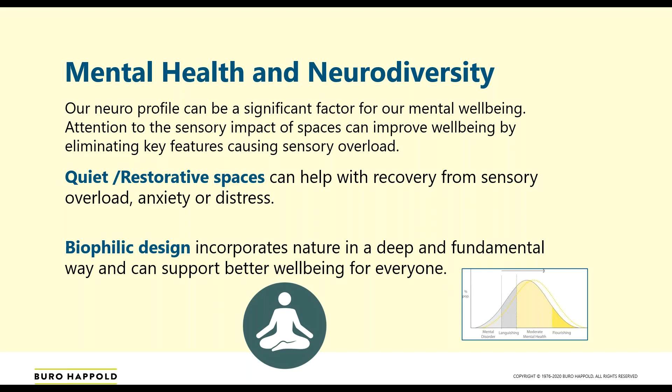So this quiet and restorative space is really, really important. And introducing biophilic design anywhere in the building is always helpful, because it reconnects people with nature, and nature is definitely a calming influence for everyone.

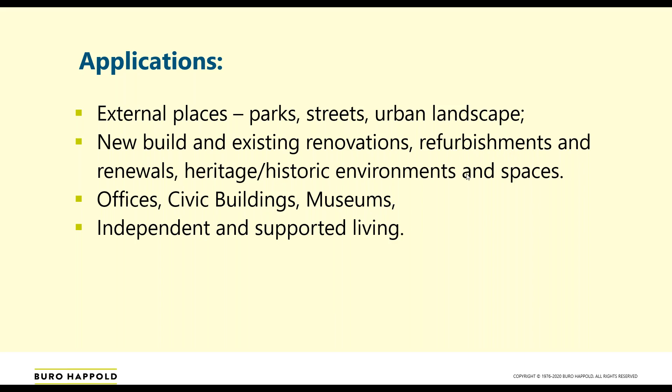So on application and evaluation, I'm hoping it will be applied to all types of environment, right from external parks through to independent and supported living even. We can certainly see on our own work that there's applications for museums, offices, civic buildings, and so on. And we're pulling it in on refurbishments, because a lot of buildings now are being repurposed.

Application, so not prescriptive, not mandatory, but full of choice and variety that you can look at. Hopefully, you know, humans are neurologically diverse, and we need to take that into consideration.

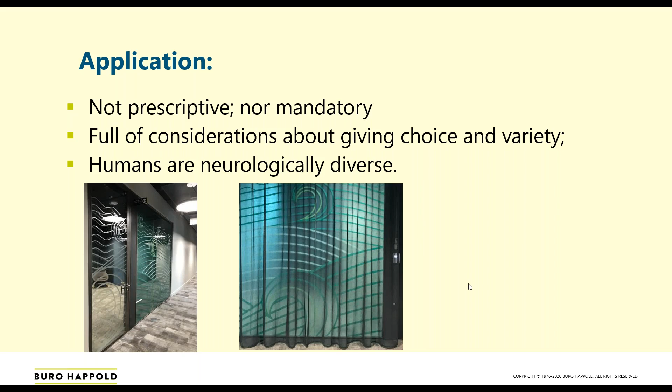So this is an example from BBC. Love this image, walk past it, not a problem. If you're sitting in the room, might be a bit intrusive. They've got a voile curtain they could pull across. And on other windows, they've managed to put an opaque layer of film on to tone it down as well. So you get two different views of the same thing. So it can be really easy, quick fix things.

So typically this is going to have a 2-year shelf life. It's currently free to download, courtesy of Sport England. BSI are hoping maybe to trial some new feedback mechanisms. So we do want feedback. We want people to try it and apply it and give us feedback and case studies, etc. And hopefully over time, and I might say more on this, it can be embedded in either a British standard or an ISO. We couldn't find in our lit review anything anywhere in the world, and certainly people have been contacting me internationally for this information.

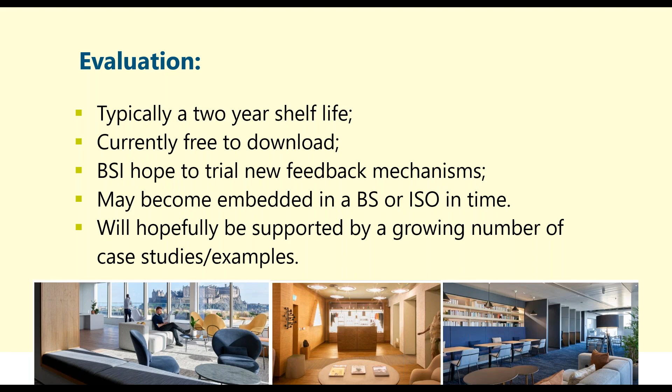So love your case studies. It's been hugely informed by human experience and stories shared, etc., by some amazing experts. So big shout out of thanks to them. We've got lots of links to other documents where you might need them.

I mean, I've been 21 years in inclusive design or accessibility, and throughout that time we've been endeavouring to capture diversity of our physical needs. But we've done so much less on sensory and mental health and well-being, and I think this is the time to sit up and look at that.

We don't operate in isolation from our environment, whether physically, mentally or emotionally. And if you wanted to grow a beautiful garden, you'd expect it to have different plants that needed different watering mechanisms, different amounts of shade and sunlight and feed and everything else. So, you know, that's just plants and flowers. Why would we expect humans to all be the same? Of course we're not. So hopefully this is just the start of a long journey to recognizing our uniqueness.

So back to Ant for Q&A, and I've just put some ways to keep in touch.